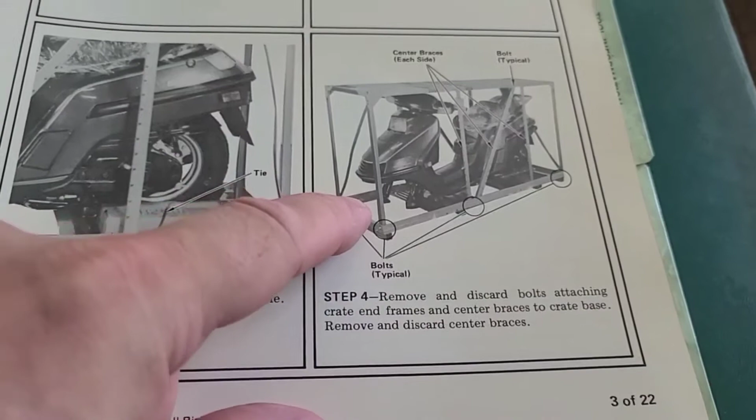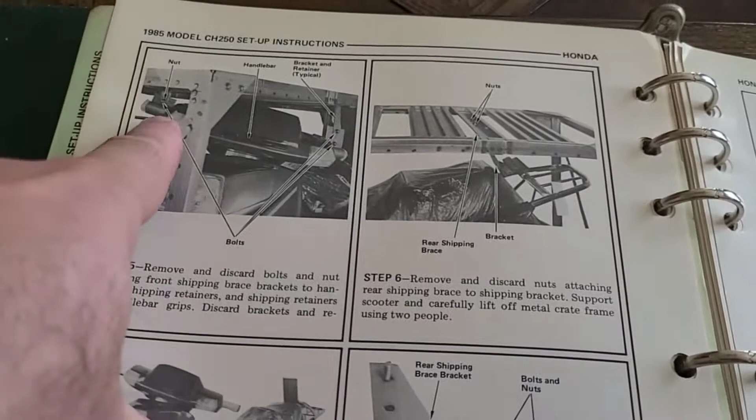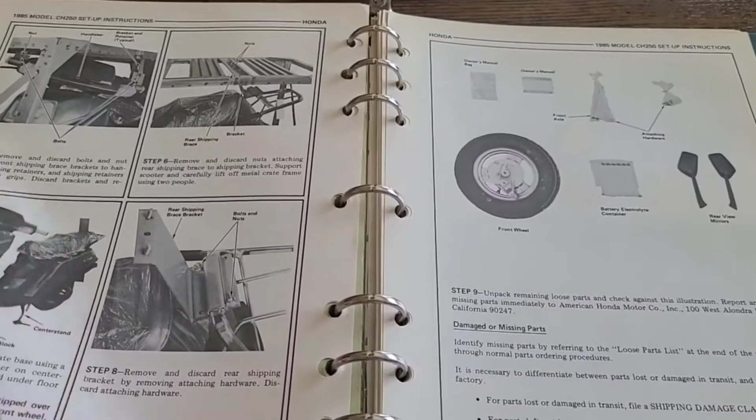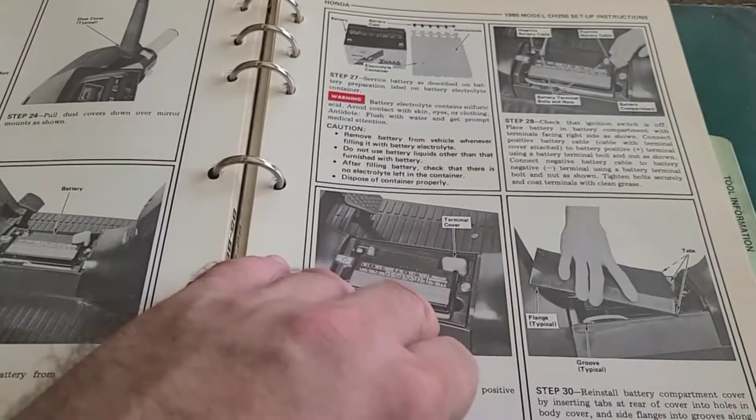This book is for an 85, 86, 87, and 88, and each one of the bikes has its own setup instructions. What's really cool is it shows you from the crate - all these bikes came in on a crate, and they still do. It shows you exactly how it came in the crate and exactly how to remove it, what came separate that you'd have to install, showing you how to disconnect everything, unbag it. This is something that would be included with your scooter when you bought it, and they made this book to include all the different things you'd have to do to get it ready, even showing you the battery and how to install it.

When you flip through this, you get to the final page - even an inventory checklist of everything that came in. Then on to the 86. Each one of the models has its setup instructions included in this.

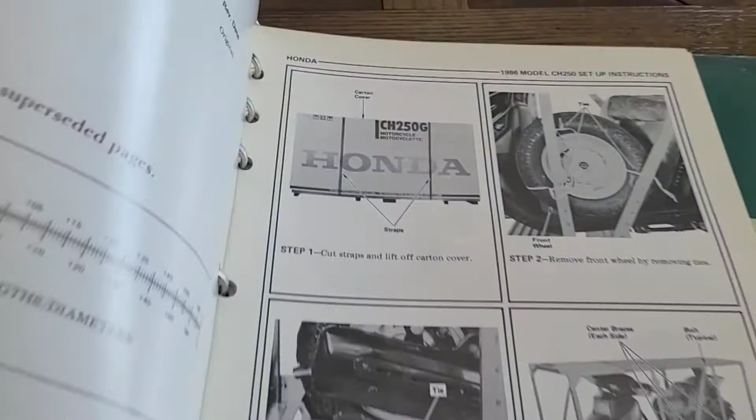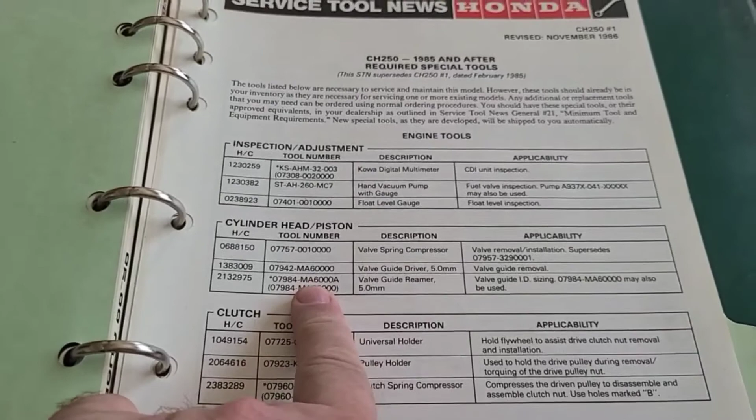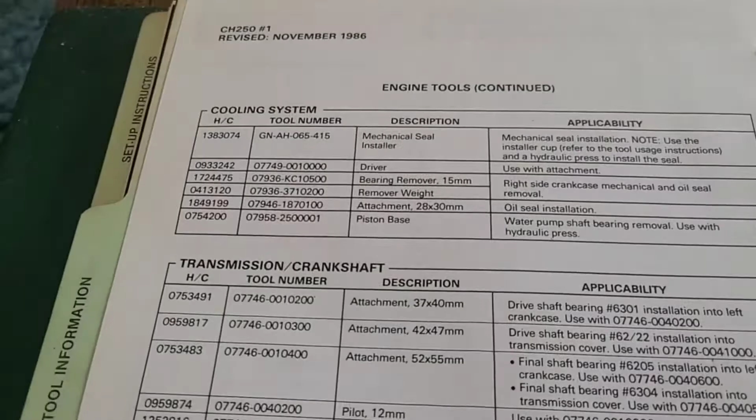Not only is that cool, you get to see exactly how the 86 was boxed up, but you also get to go into tools - a section for what tools are required for each different thing. Different adjustments, cylinder, clutch, alternator, showing you what the required tools were for the bike. Everything from the cooling system, transmission, wheels, suspension, and then optional tools even.

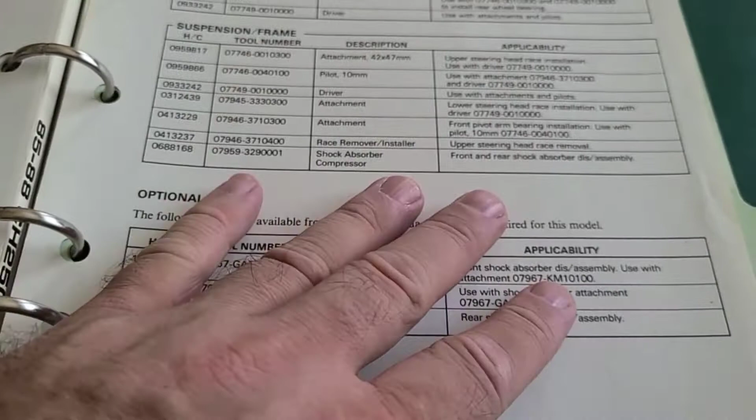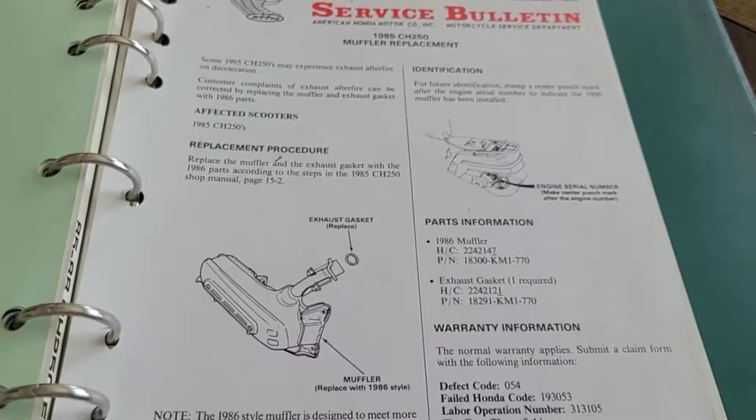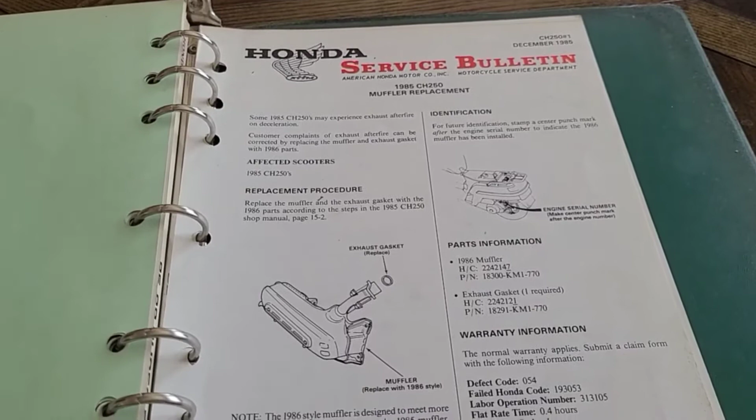But that's not even what's really cool. These last couple pages I thought were awesome, and that's the service bulletins. What makes these cool? Well, I just recently bought the bike and noticed there was a little bit of afterfire or backfire when I was decelerating. I'm like, what's wrong with this? Come to find out, there was a service bulletin from December 1985 talking about just that.

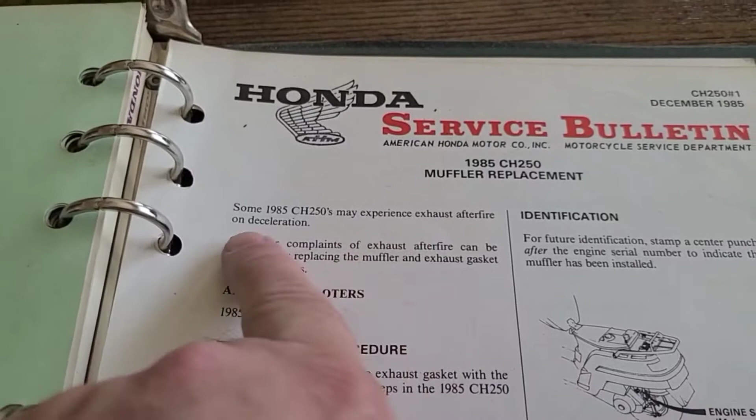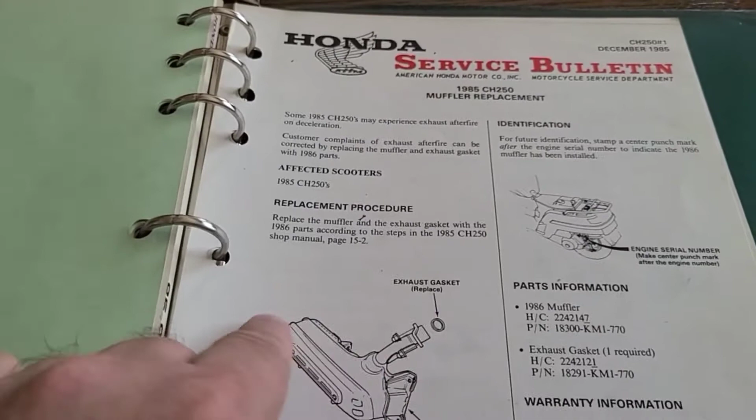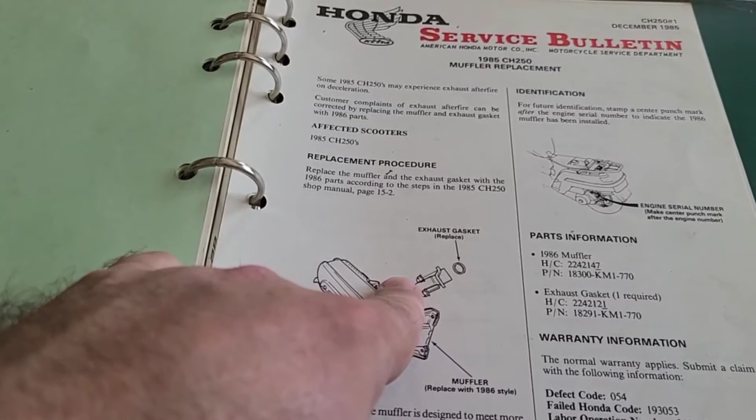It says you may experience exhaust afterfire on deceleration, and they basically tell you that you need to replace the muffler along with the gasket, which I think is kind of extreme - go out and buy a brand new muffler for the bike. But I'm not sure, because this was a bulletin, maybe it would have been included and you could have taken it to your Honda dealer and they would have replaced it for you. I'm not sure.

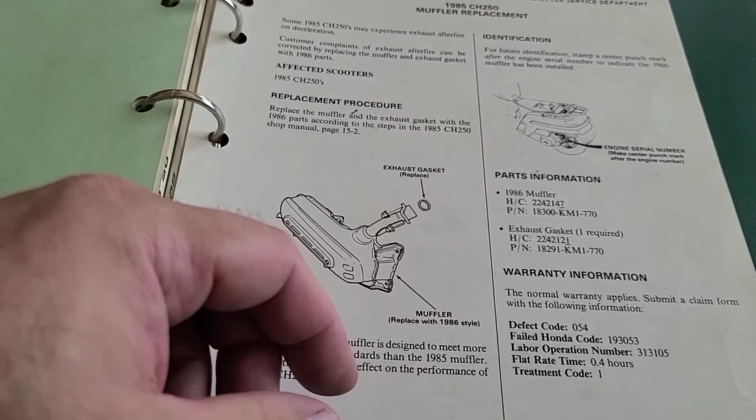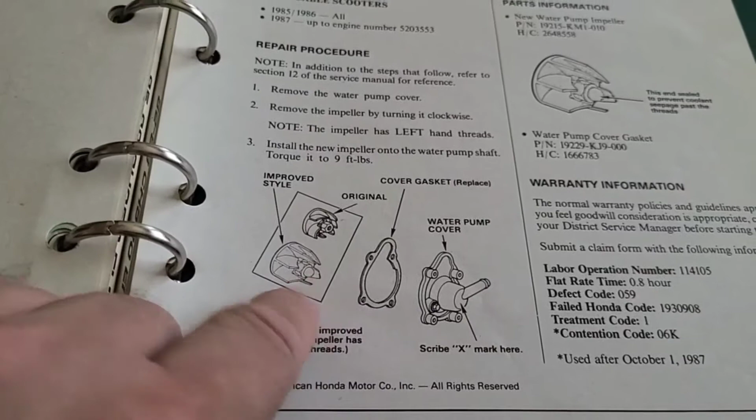Very, very cool, and this was the first service bulletin. Then there was one on the water pump as well - the impeller, changing it along with the gasket. This was because there was a problem with some coolant leak from 85 to 87, so they're showing you what you can do to replace it.

That's why this book was really neat, because you always find it with just that first part, but to find one that's got the service bulletins all laid out for you too, and then the tools that are required in order to service the bike - and read this, I thought that was funny. Each one of the models from 85 to 87, the setup instructions are all included.

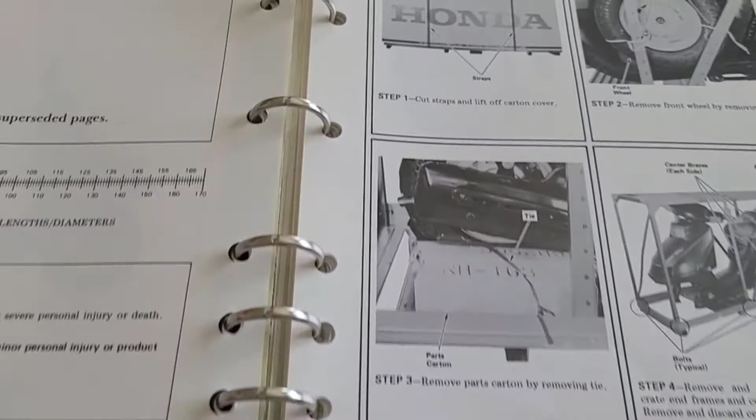Very, very neat, and I wanted to share this just because I've never seen one laid out like this. By the time I started working on the bikes, even 20 years ago or plus, I'd always find this - you'll go out onto eBay and find tons of these. But what they would do is take it and break down the book. I've never seen one as complete as this, showing you everything, and in the original binder too. Just thought it was awesome and wanted to share it with y'all.